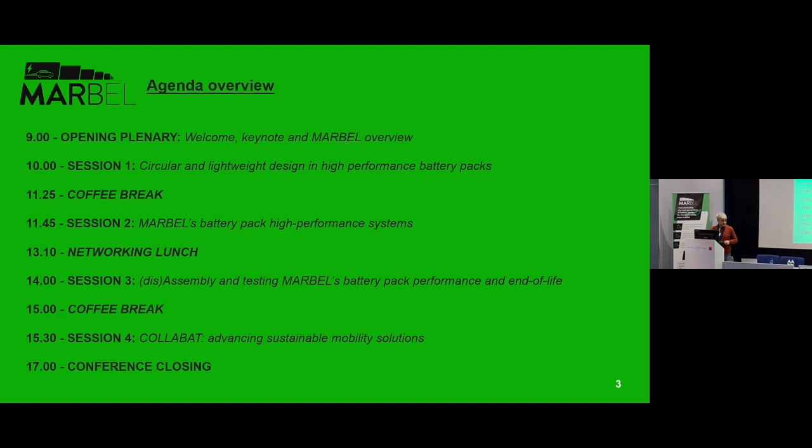So actually, what is written here? I give the stage to Edward Piqueras, the MARBEL coordinator.

Okay, buongiorno tutti, good morning. And special greetings for all fathers in the room because of today. I think, in the name of all the MARBEL team, we are very happy to be here today in Centro Ricerche FIAT, one of the most important innovation poles in the automotive industry in Europe. It's a pleasure to be able to close the project after these last 4 years of work, which today we will present here at Centro Ricerche FIAT, in the Stellantis Group.

My name, as you said, is Edward Piqueras. I work at Eurecat Technology Center, a research and technology organization with about 800 employees in the region of Barcelona. We work in several research and technology domains, from materials to digital technologies, etc. In this case, we teamed up with different organizations in 2021 to tackle different challenges in the electrification of mobility.

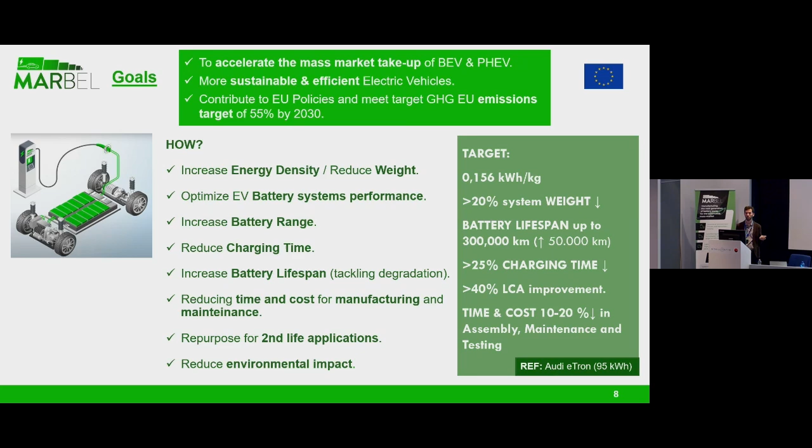Here you can see the KPIs we focused on at that moment, using as benchmark reference the SUV segment, the Audi e-tron 95 kilowatt-hours, and these were our KPIs for reduction of weight, increasing the lifespan, the charging time, LCA, and times and cost of maintenance. This is how we do it, and the details you will see today during the presentation of the different sessions.

In session 1, you will see all what concerns the design for facilitating the circularity and the repurpose of the different components of the battery, making the battery modular, scalable, easy to assemble and disassemble, lightweight, using recycled materials to reduce the environmental impact of the battery, working with weldless connections, weldless bus bars, wireless communications.

You will see all these eco-design strategies, how we thought about these eco-design strategies, and which kind of methodology we implemented to tackle those actions that can get a major impact on the battery.

After this, in session 2, we will talk more about the performance of the battery: how we enhance the thermal management, how we work on strategies of ultra-fast charging that don't reduce the performance or life or degrade the battery, the way of managing the battery — the brain of the battery, the BMS — the use of wireless communication, etc. All this will be explained in session 2.

Plus, we have one of the partners working on a data-driven digital twin for prediction of degradation in the battery.

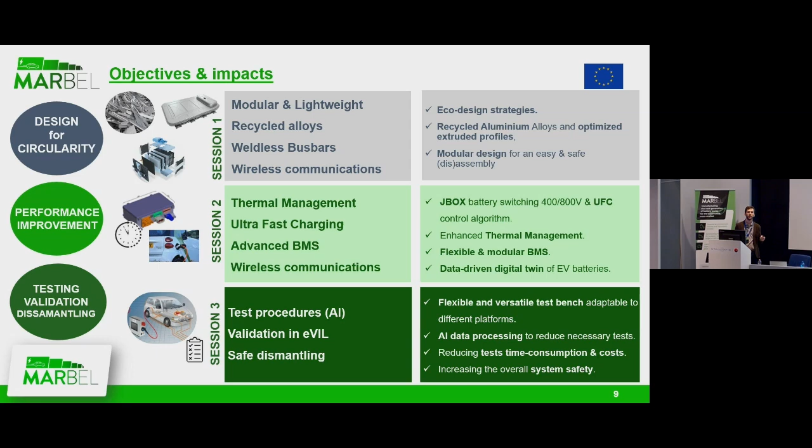You will see all this, and finally in session 4, you will see an overview of what has been done in the other sister projects from the same call. In that same call, the European Commission asked for tackling these challenges, and there were also 3 other projects apart from us, working with other OEMs like Mercedes and others, using different approaches to tackle these topics — lightweighting, thermal management, etc. They were invited today to show their perspective and the innovations they brought. This will be presented in the last session.

As I commented, we started in 2021 setting up the requirements for safety, modularity, etc. And then we developed the solutions and designed the modular, weight-optimized and high-performance battery.

This took us through several iterations around a cell, because we made changes over the course of the battery, from the initial cell we were working with to the final cell. We kept the geometry, because of the concept of modularity, but we changed other aspects.

This made us iterate a bit until we had the final design ready to manufacture and then validate. You have to see the battery - it's here in CRF, but in another building. It's a prototype, not a battery ready to be put in a car, but a bench for testing how the different innovations we put in the battery, the different eco-design actions, enhanced systems for thermal management, ultra-fast charging, etc., perform in a real environment. You have to consider you'll see it as a prototype.

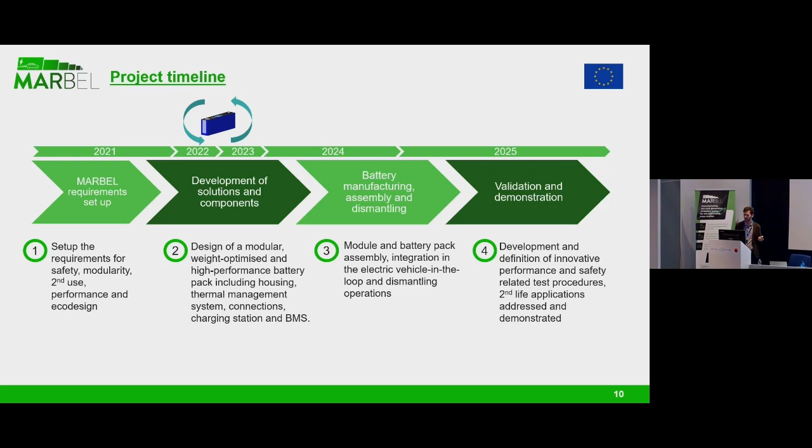What we expect to get, or what impacts we expect to bring to the industry and to society, is, as explained before, the goal of fostering the acceptance of electric vehicles by users, tackling range anxiety and concerns of the final user regarding charging time and the range of the batteries, to get more autonomy on the vehicle.

Also, it's a very important point for us, the sustainability of electric vehicles. Doubling and enhancing lifespan reduces the impact of the batteries, but also working on all aspects of battery design permits enlarging the life of the battery. This applies to the materials and components that are part of the battery, not only for the life in automotive use, but for repurposing in second life.

Finally, all this electrification of mobility in Europe aims at reduction of emissions, and is aligned with the new industrial strategy for Europe, the circular economy action plan, the new directives on batteries and the battery passport, the circularity of components and materials inside these components, and finally the reduction of greenhouse gas emissions in the European Union, especially in the transport sector.

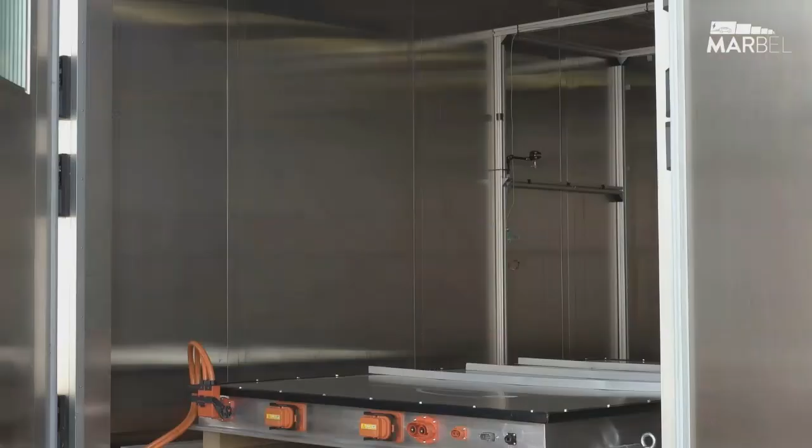Okay, well, with this nice video we prepared it especially for this event and closing the project. There will be an extended one that will be published also by the end of the project.

I just wanted to say that during the event, for us it's very important to collect feedback from potential end users of the innovations, or people, players in the sector. That means tier ones working with BMS, with materials, OEM, etc. The perspective of the people, players in the market is very important for us.

We will have a QR code that we will show on the screen during the sessions, with very short questions like: what do you think are the risks, opportunities for adopting this? Do you think this should work well? Just to collect this kind of information. We'll try to collect it also during the coffee breaks, etc. And I really appreciate if you can give us this perspective and this input.

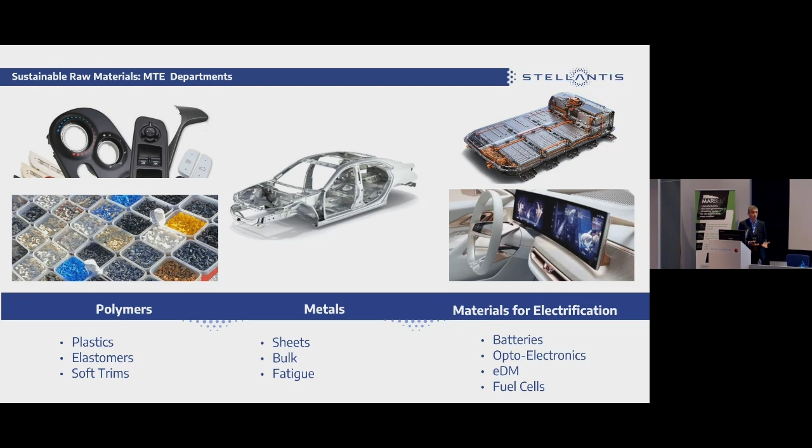As you see, when we're talking about material for electrification, we have batteries, we have fuel cells, we have EDM, so electrical driving motors. We obviously have metal and polymer as well, because those are two materials. What is the difference? Let me say that for metal and for polymer, we have the traditional approach to these materials that we have in car making. In my team, the team of material for electrification, we include all the materials that enable electrification, with new functionalities and new performances that in the past we didn't manage, we didn't control, but now, due to electrification, we have to manage, we have to control.

When we start with this simplification, we want to converge to battery electric vehicles, so to the production of batteries and the EDM. We started to have some joint ventures, because in the past, 10 years ago, we didn't produce batteries, we didn't produce electrical motors. So we had to start with joint ventures.

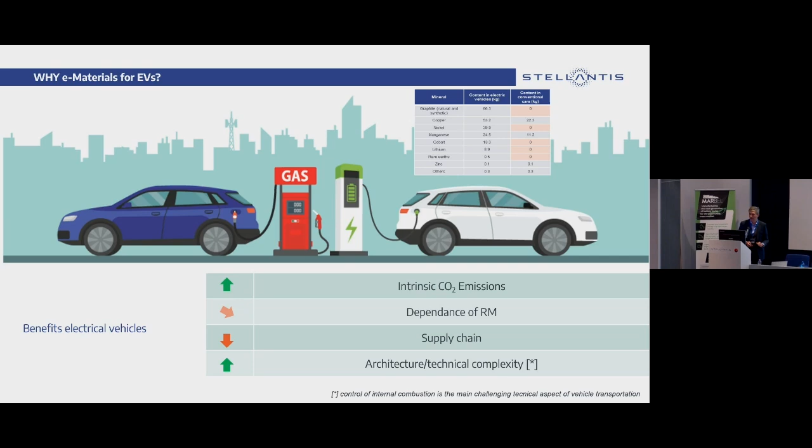So let's look at the figures. If we compare materials between combustion engine traditional vehicles and electrical vehicles, you see that we have an increase of raw material inside the vehicle. As I told you, we have a stronger dependence on raw material, and this has forced us to invest in raw material - this is the reason why. Here you have an overview.

Basically, in the combustion engine, we have copper, we have manganese. Here we also have graphite for the anodes of the batteries. We have nickel for the cathodes. We have cobalt, we have lithium, we have rare earths. An increase of the rare earths because we have the electrical driving motor and for the main traction. So we have a great amount of the rare earths, and we have also other raw materials.

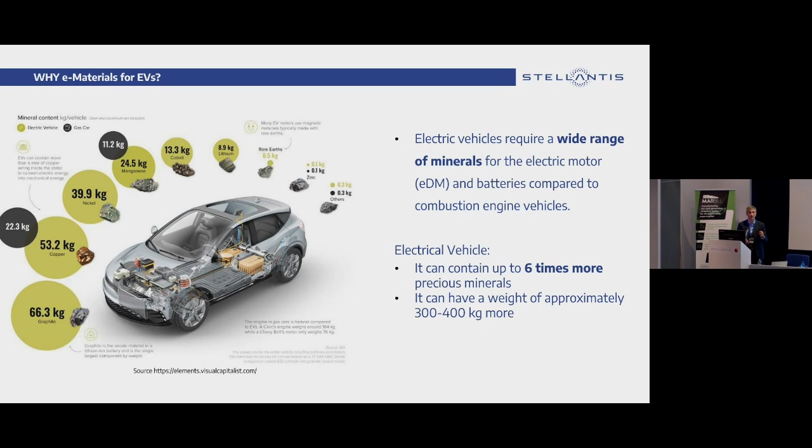So you can see that we have 6 times more of the precious material than in the past. And this is quite important, quite crucial, because we have to manage this material in order to maintain the cost of our vehicle. But the material cost is not only our challenge.

We also have to manage the growing demand, the environmental concern, the supply chain, the human rights violations, because this is quite important. Because if we start to manage the raw material, it is not only a case of performance, but we also have to take care about cost, and obviously about some other aspects.

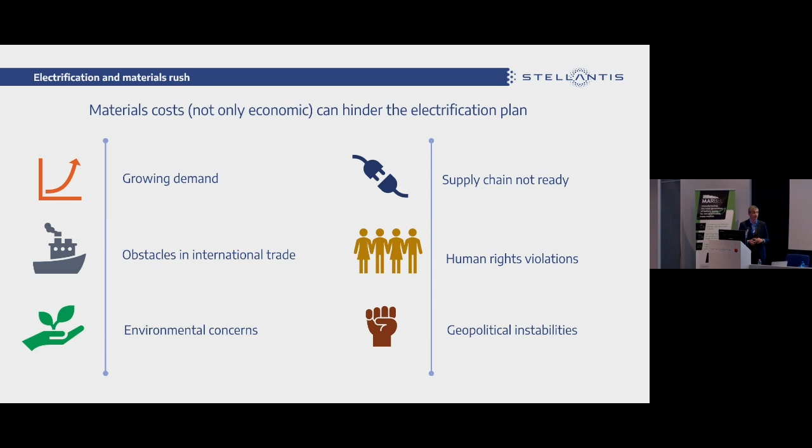We know that in the case of thermal separators, we have mica, and we know exactly that there are some issues in the extraction of mica. In the material, we have nickel, manganese, cobalt, and we know that there are some well-known issues in the extraction of cobalt. So we also have to manage this ESG issue in our material value chain. In the past, we didn't do this.

So with the vision of the European Commission, we can say that we have a map of the materials, and obviously many of our materials in this vision are critical. Critical not only in terms of shortage, but critical for many regions, critical for geopolitical reasons, for human rights, for oscillation and variation in cost, and other issues.

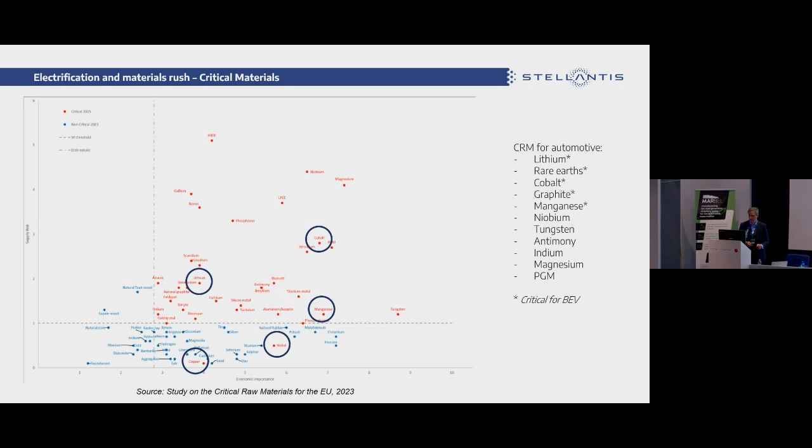One of the issues is refining, because if we have the possibility to have offtake of material, but then if we need China or some other countries in order to refine this material, we basically always have a bottleneck. So we don't solve the issue, and this is one of the issues that we have. For instance, in terms of cobalt, we can extract it in Africa, but then approximately 80% of the refining of the material is in China. So we have a great issue depending on this market.

So what we are doing as a company, as I told you, we're trying to manage all these issues, and we're starting to invest in raw material. From a technical point of view, this means that we are increasing, we are investing in our skill and in our competence in order to manage not only the performance, not only the properties, but also the raw material, and we're starting to push our material in the value chain.

This is the different approach that we had. Obviously, this is the case of the battery pack. We can have a buy or make approach. In this case, for the battery pack, we're starting from a buy approach with our supplier. So with agreement, we discuss about the performances, and we ask them to design and produce the battery pack for us. Obviously, the trend and the vision and the target is to move to a make concept.

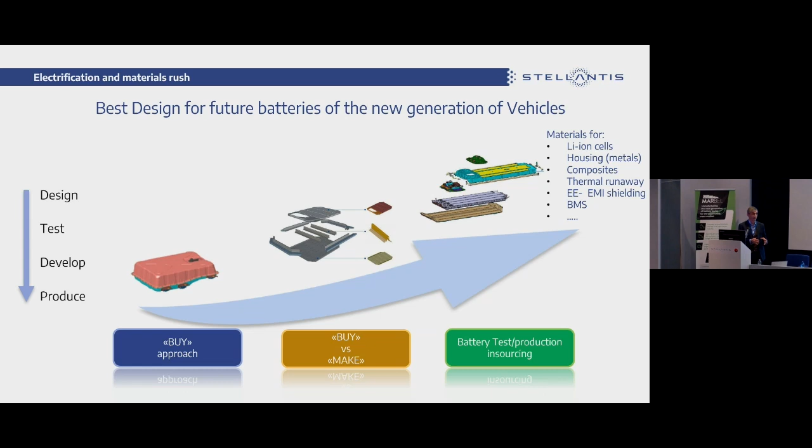So the idea of the company is, as I told you at the beginning, to start to produce the battery pack ourselves, to produce the battery cells ourselves, and the same thing for the EDM, the electrical driving motor.

Let's go in, as I told you, in order to manage the issue, we have to manage the production, and to really have a benefit in this make approach, we have to manage the whole value chain. Here you have a schematic vision of the value chain for the battery cell.

As I told you, Stellantis started to invest in raw material. So at the beginning of this line, with the securitization of offtake of lithium hydroxide, nickel or manganese, and then we are at the end in production of the battery pack, we started to manage, to control, to have agreements in the value chain, because this can give benefit to Stellantis. So I mean, for the refining step, the precursor cathode material, the cathode material manufacturing, the battery module manufacturing, and finally to have our product in-house.

In order to manage this material transformation, we have to take care about the raw material, and as I told you, we have to increase our skill and competence in the assessment of this material.

Here you have a schematic of the critical material only for the cell, the battery cell, taking into consideration that this is a case study. So in our perimeter of material for electrification, we have not only the battery cell, but also the battery pack with new material that prevents thermal runaway, and also the perimeter of the fuel cell or EDM.

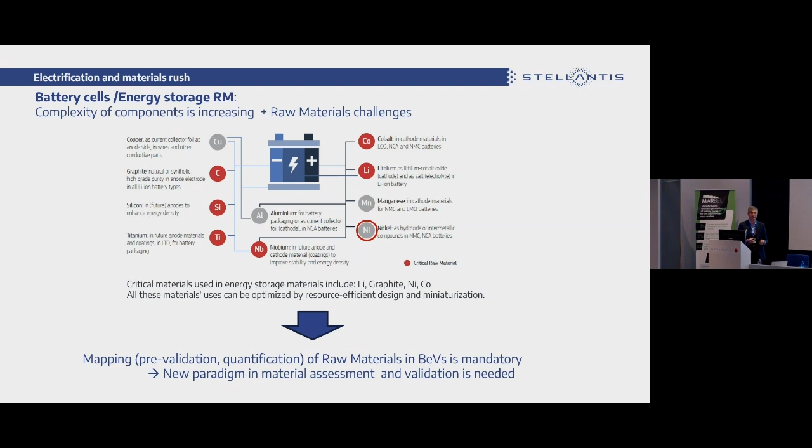We are investing in mapping, pre-validation and quantification of the raw material in our components, but not only that. We are also investing in new methodologies to validate the raw material at the beginning of the value chain.

The case study is for NMC. Probably you know that NMC is one of the technologies we have in our battery cell. NMC means a crystal in which we have nickel, manganese, and cobalt in different percentages due to the different energy density that we want - so 811, or 333, or 622, different amounts of these three materials.

This is for the cathode, and the advantage of this crystalline structure is that we have a layered structure in which the lithium ion can go through and release the electron charge.

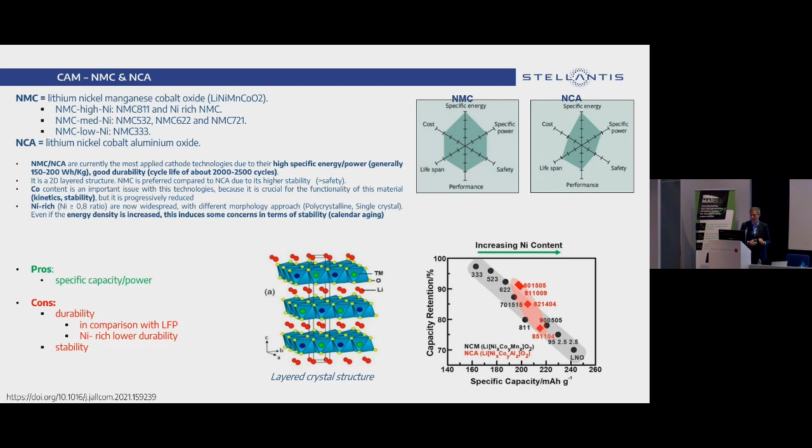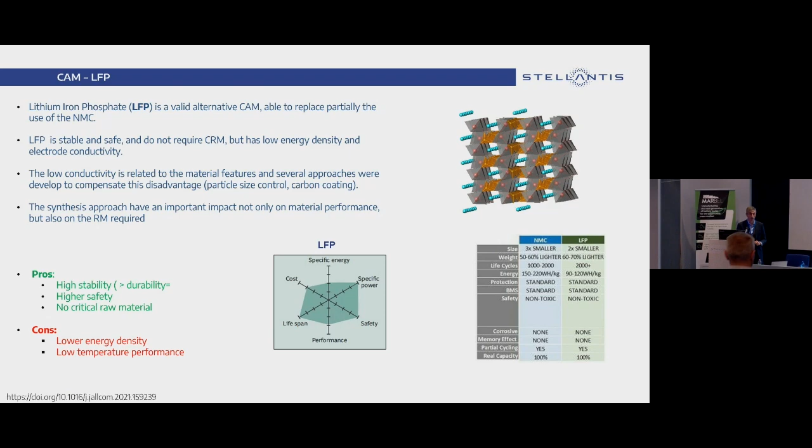This is another technology, because we have two main technologies that dominate our cell. It is NMC, as I told you, but now we also have lithium iron phosphate, another crystal, another structure with other benefits. So we have a more stable structure, even if we have lower energy density and electrode conductivity. This means we can use one or another technology for our vehicle, depending on the final target.

So what we are doing, as I told you, is investing in our competence and skill. Basically, we are invested in the assessment of this active material.

This is to show you that we try to evaluate our material, but because we have an innovative DNA, we also try to discuss with our suppliers in order to increase performance or optimize the material.

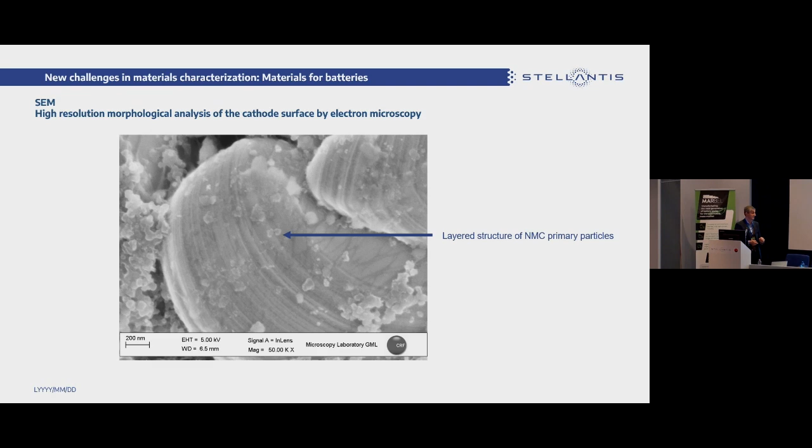Not only the cathode, but we are also managing the anodes. The anode is basically based on graphite, another raw material that we are securing. There is a lot of discussion related to graphite - natural graphite, synthetic graphite - and how to manage and recognize the two different kinds of material.

And finally, the separator and the electrolyte, which are two other materials of our cell that we are characterizing, and we have some experiments for solid electrolyte.

As I told you, we are working on this to support our suppliers with a pre-validation of the material, but at the same time, we are working to innovate, to increase the technologies and performance of our cell and components.

Finally, as I told you, I tried to explain to you the situation of the active material.

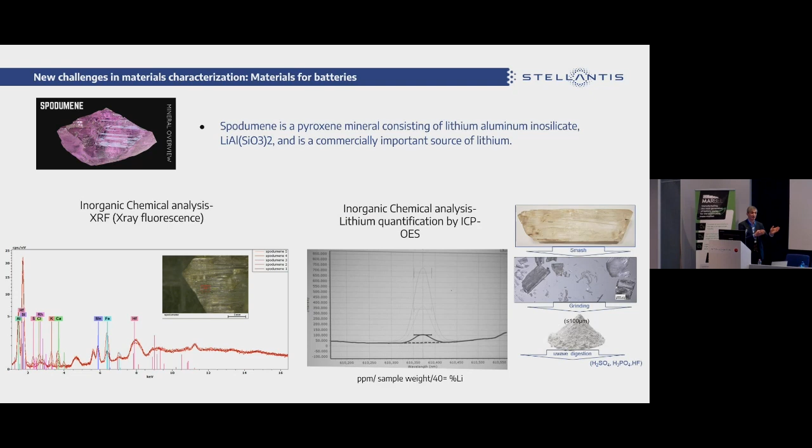So the material that we have in the cell: cathode, anode, and separator. These are part of the cell. But at the same time, we're starting to work with our lab on the raw material - how to recognize that the lithium hydroxide, the nickel sulfate is exactly the grade that we want in our cell. Basically, we are working as material engineers, as material department, as material lab, in order to define a protocol of qualification and pre-validation of this kind of material, in order to introduce and speed up the value chain and to speed up the production of our cell.

So that's it from my talk. I tried to give you a different perspective of energy storage and the battery cell, not starting from the performances like OEM, but starting from raw material. This is because we think and we know that these are the new scenarios we will have in the future, because if a company wants to invest in e-mobility, we can invest in new performance, in new components with higher performances, but we cannot forget the raw material, because raw materials are quite fundamental for e-mobility. Thank you very much.